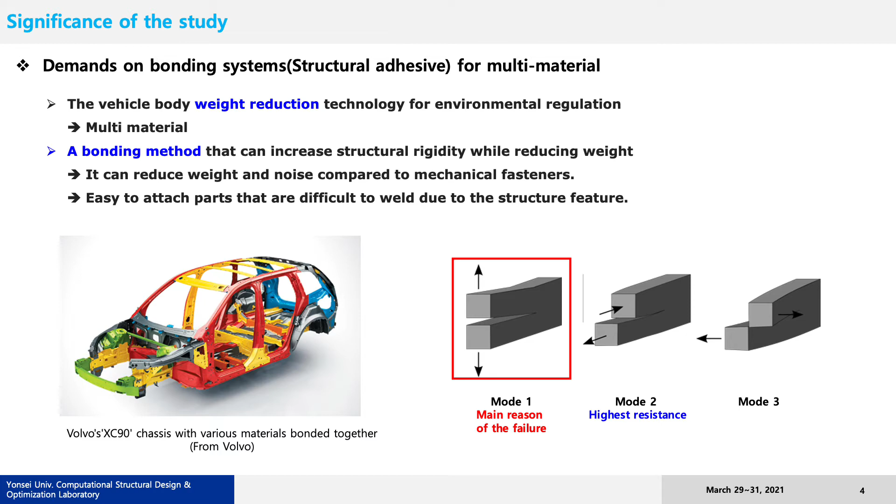In this study, a design method that considers the characteristics of such adhesives is applied to the stiffness design of multi-material structures. To solve this problem for the multi-material stiffness design, in this study, interface tension energy density, called ITED, was newly proposed. This ITED ensures that the adhesive area can be located in the compression area so that the adhesive does not get stressed in the tension mode.

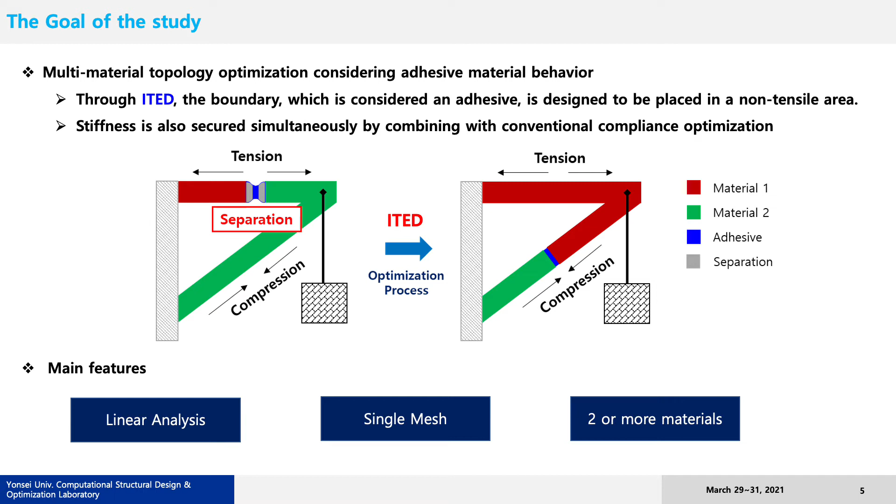ITED has 3 features compared to the previous studies. Since there is no need to simulate the nonlinear behavior of the adhesive, it becomes a linear problem and makes the problem easier. In addition, since a special mesh for boundary simulation is not required, it can be analyzed as a single mesh. Finally, it can be easily extended to more than 2 materials. These 3 characteristics are the differences from the previous studies. In this chapter, I introduce the method I used and what I proposed.

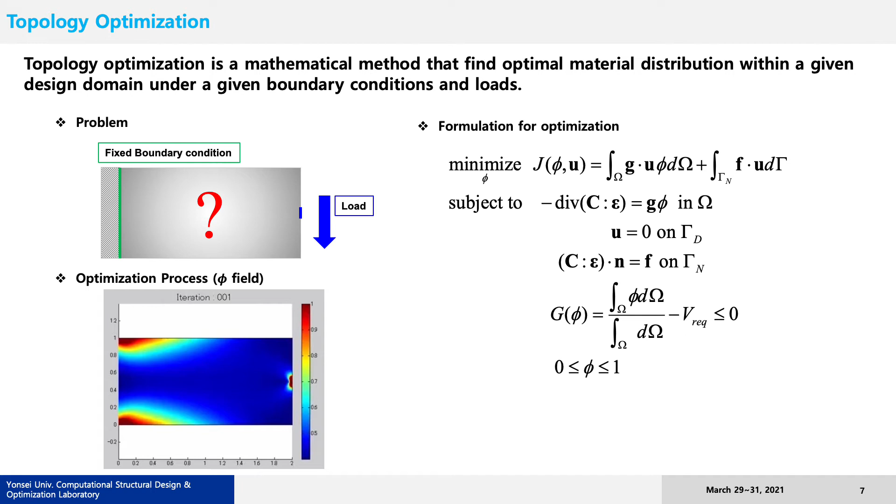Density-based topology optimization is a mathematical method that finds the optimal material distribution within a given design domain under given boundary conditions and loads. We employ this for the design of stiffness structures. In this study, we newly proposed interface tension energy density, called ITED.

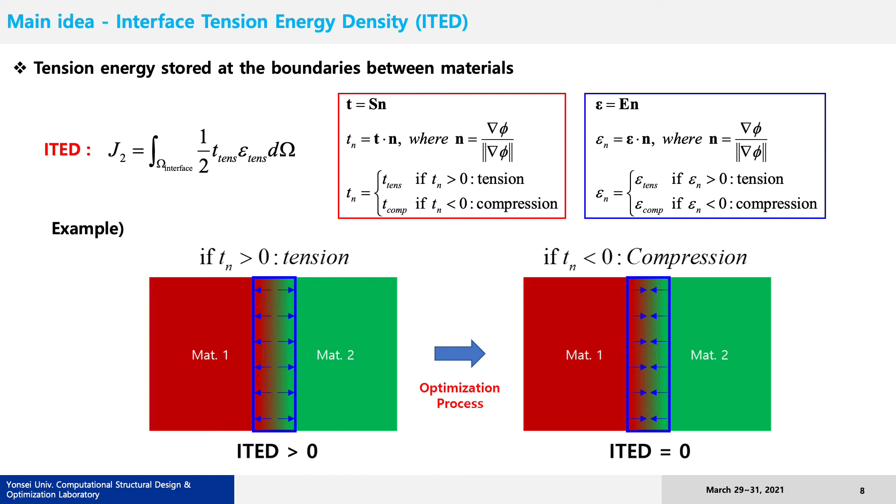ITED refers to the tensile energy stored at the boundary between materials. Therefore, it can be defined in energy form as the product of the tensile vertical stress and the tensile vertical strain. If the material boundary is tensioned, ITED is positive, and if it is compressed, ITED becomes 0. So by adding this ITED to the stiffness objective function, the optimization proceeds by penalizing the part where tension occurs at the material boundary. Finally, the combined objective function secures the stiffness of the structure and at the same time prevents separation of the material boundaries.

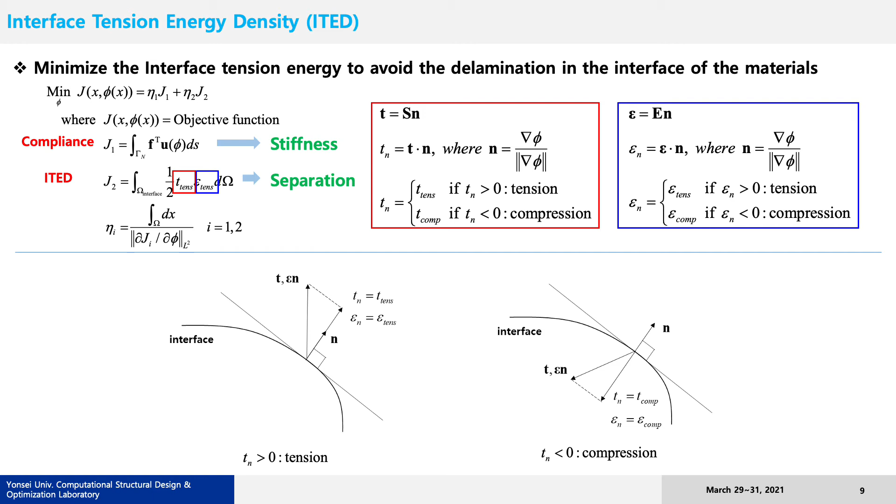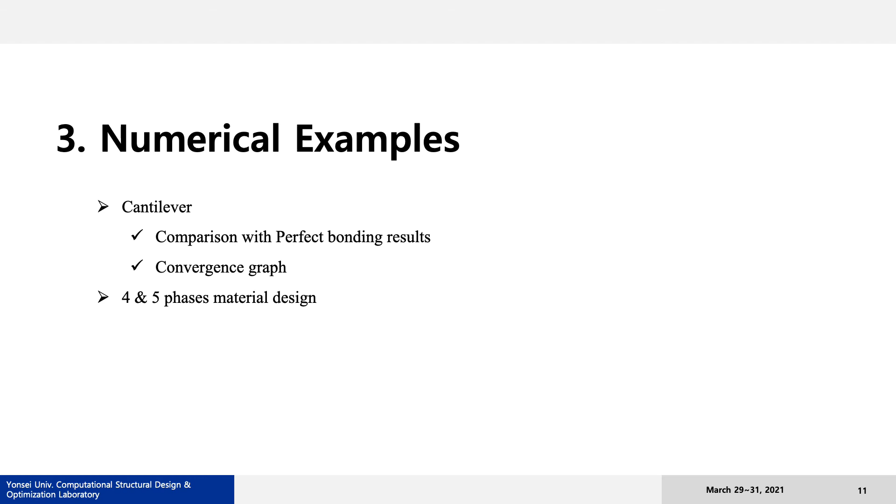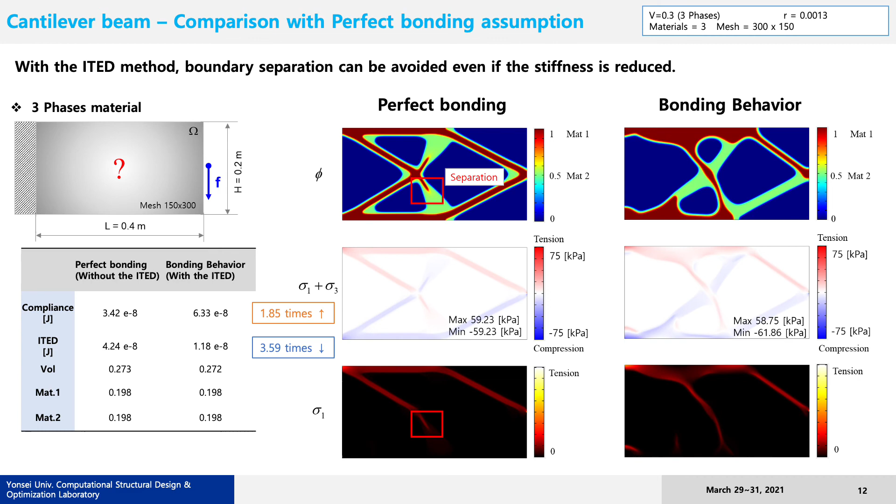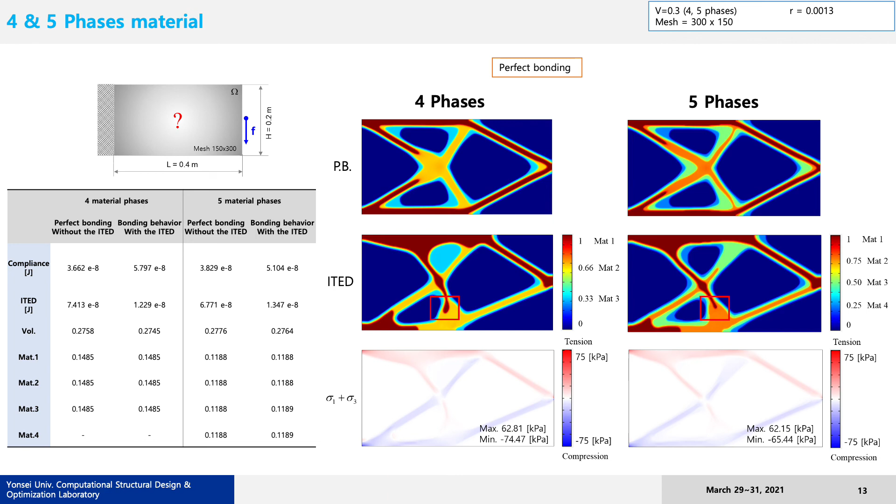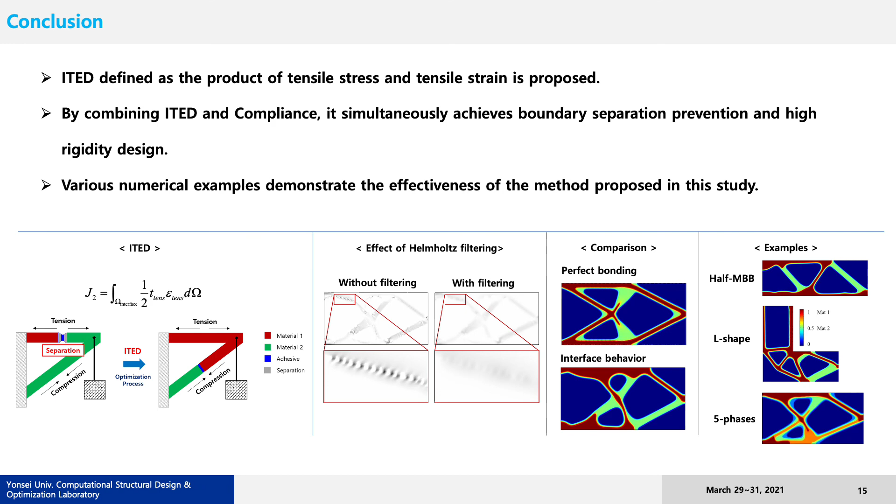Conclusion. ITED, defined as the product of tensile stress and tensile strain, was proposed. Using ITED, we can design multi-material structures considering the boundary behavior. Lastly, various numerical examples were shown for the effectiveness of the proposed method.